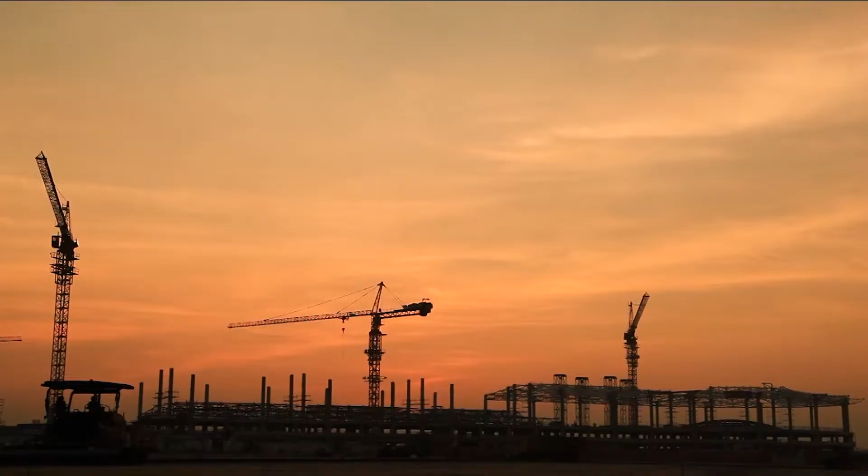A brand new hyper-modern airport is being built here, which is a new starting point for connecting Hainan to the world.

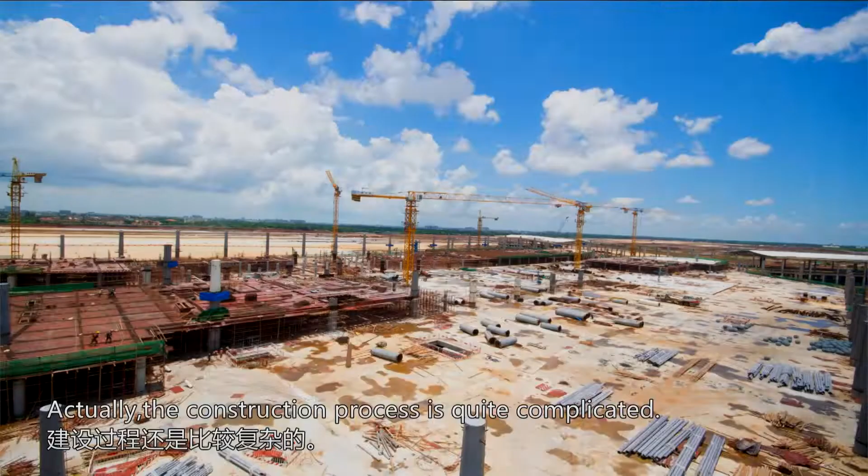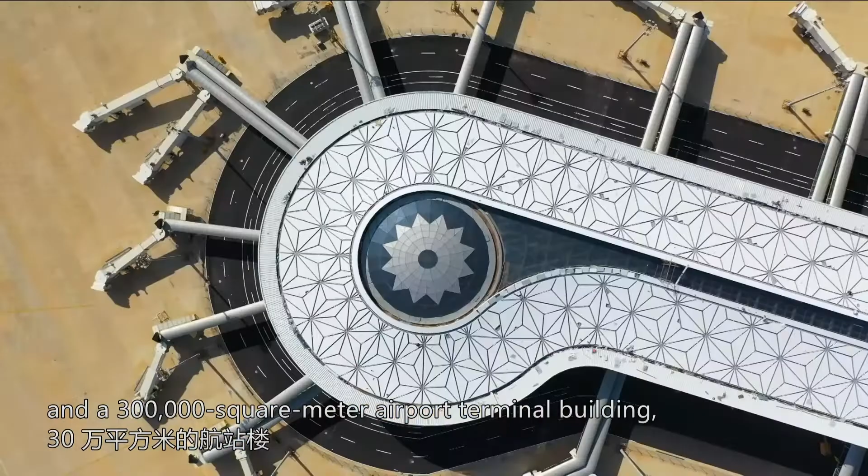Here they build the 4F airfield zone, Category III ILS systems, instrument landing system, and a 300,000 square metre airport terminal building. This is a major project of symbolic importance for the construction of the Hainan Free Trade Port.

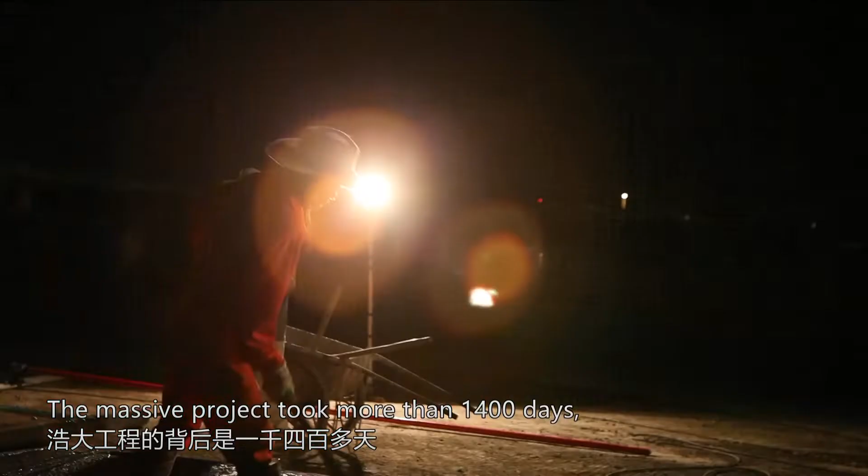Pan Jian, on-site commander-in-chief of the Meilan Airport Phase 2 expansion project headquarters. In 1992, Pan Jian came to Hainan to take part in the construction of the Sanya Phoenix Airport. During his career of more than 20 years, he participated in the construction of Meilan Airport and Boao Airport.

Meilan Airport Phase 2 expansion project is a greater challenge.

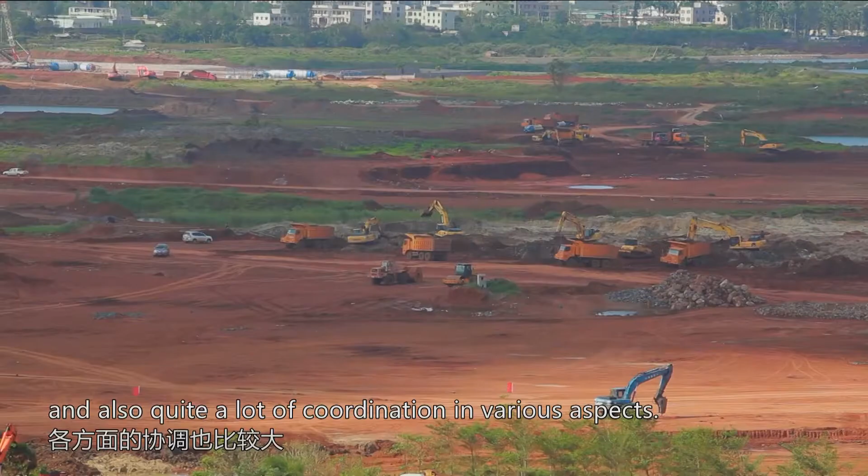The geographical location of Hainan Island makes air transportation the main mode of transportation for passengers. From the establishment of a Hainan Special Economic Zone to the construction of Hainan Free Trade Port, the very fast development of Hainan has also promoted the rapid development of Hainan's air transport industry.

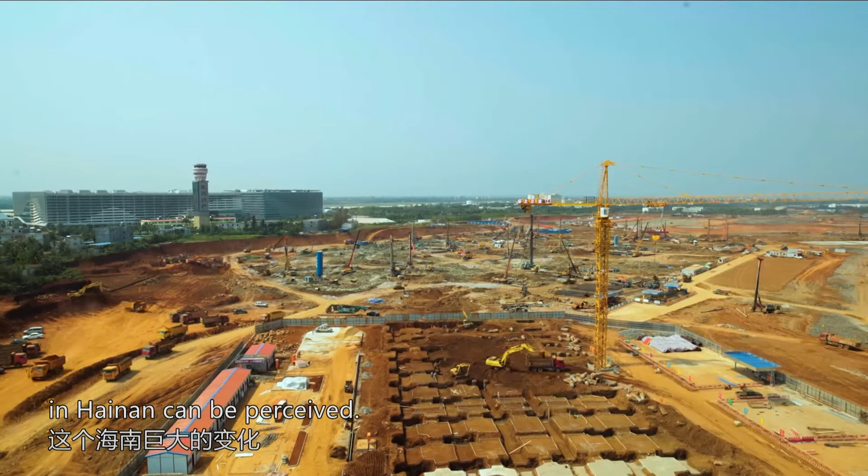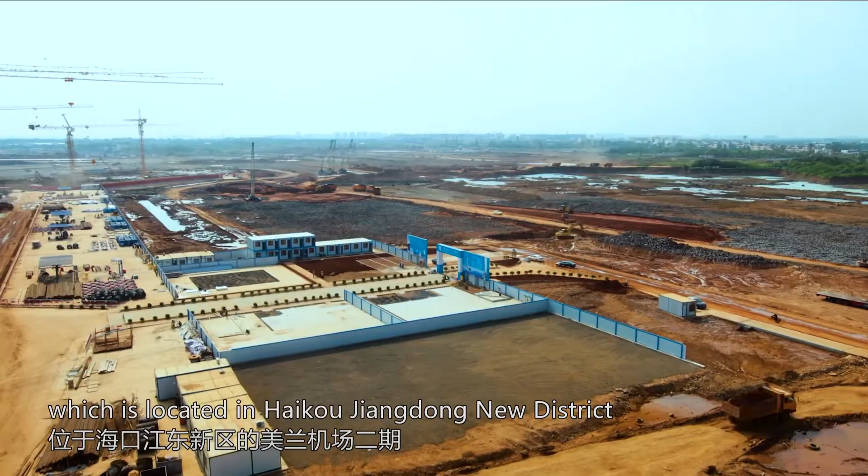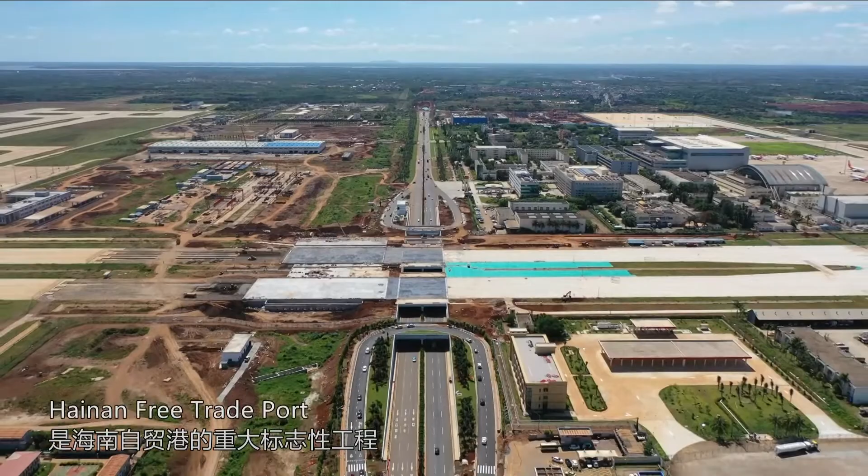On September 6, 2016, the second phase expansion project of Meilan Airport, located in Haikou's Jiangdong New District, started construction. This new airport is a world-class airport, a major landmark project of Hainan Free Trade Port, carrying the important mission of expanding and upgrading Hainan's passenger reception capacity.

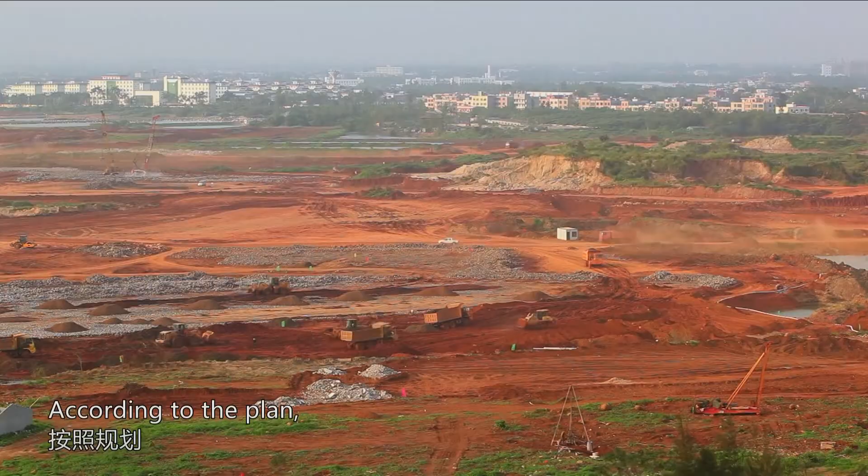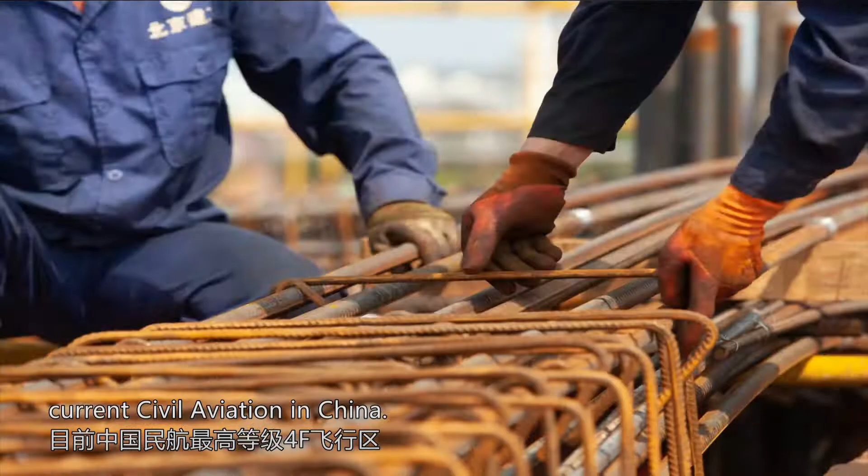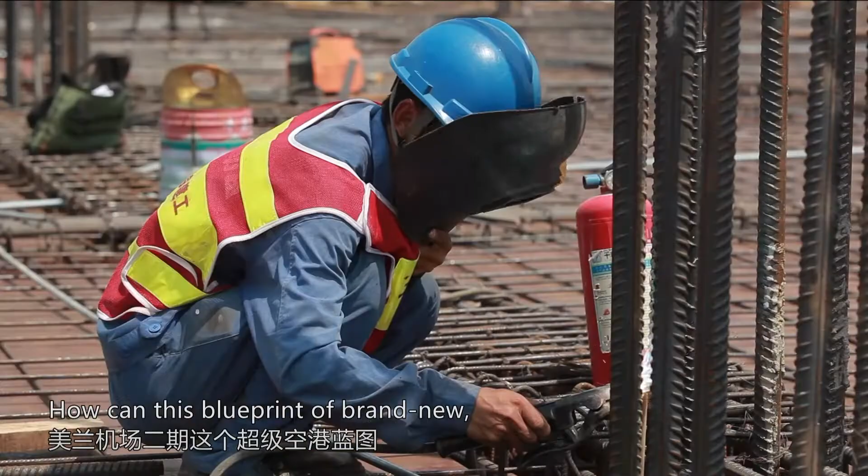According to the plan, during Phase 2 of Hainan Airport, the 4F air zone will be constructed, having the highest level of current civil aviation in China. Also, a 300,000 square metre airport terminal, a comprehensive transportation hub, and other auxiliary projects will be realised. How can this blueprint of brand new, hyper-modern Hainan Airport Phase 2 become a reality?

Hu Dongwei is General Manager of the Engineering Department for the airfield zone of the Hainan Airport Phase 2 expansion project. She worked as a construction engineer in many large public building projects. In 2003, she left her hometown and came to Hainan to participate in Phase 1 of the expansion project of Hainan Airport.

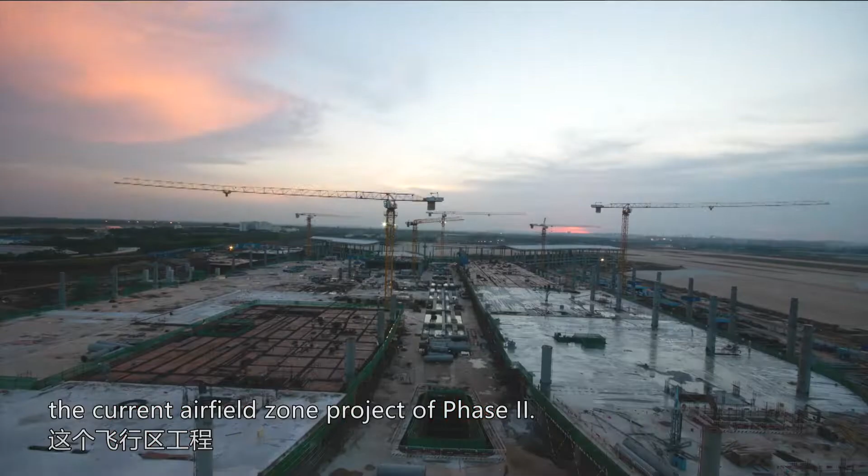During these years of practical experience, Hu Dongwei increased her skills all the time. As long as she is present, many problems at the construction site are easily solved. Danger doesn't scare her. Her colleagues praise her as Wonder Woman.

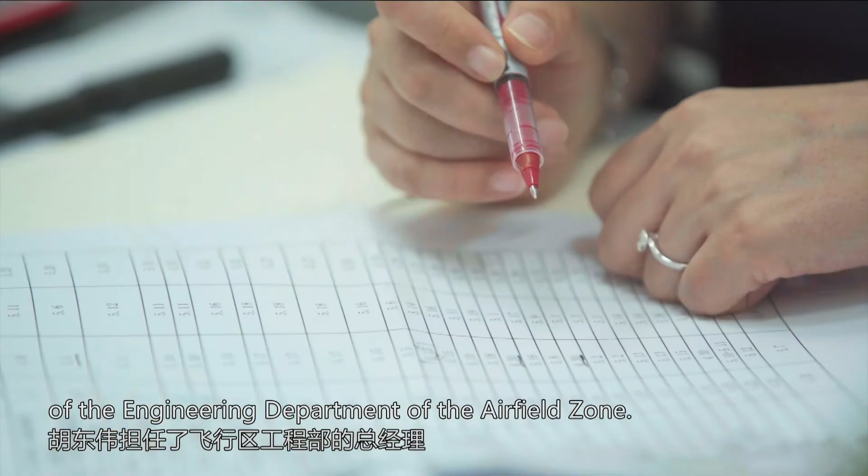When she joined the project in 2016, Hu Dongwei started to hold the post of General Manager of the Engineering Department of the Airfield Zone. Since then, she has never left the front line of the construction. Every aspect of the project is registered in more than 10 notebooks.

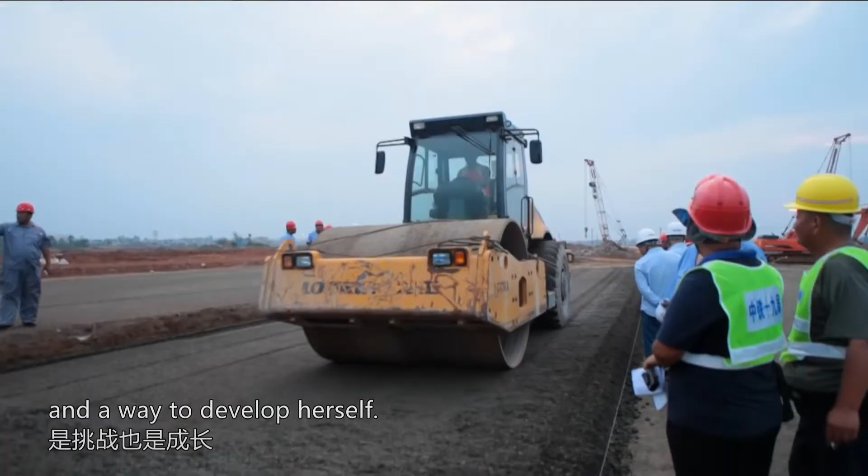Building for the first time from scratch a completely new top-level airfield zone, for two runways, was both a challenge and a way to develop herself. The project of the airfield zone is the most important basic project of the airport. It has the complicated and important task to provide safe takeoff, landing and taxiing of aircrafts.

The construction of airstrips is extremely demanding. The speed at which a plane weighing hundreds of tons takes off reaches about 500 kilometers per hour, which is 1.5 times faster than the speed of high-speed trains. To ensure the safety of flights, the airport's runway must be firm, durable and smooth. The key point to guarantee the smoothness of a runway is that the stiffness of its foundation must be uniform.

Hainan, with its tropical monsoon maritime climate, welcomes the rainy season from May to October every year. Rainy days pose many challenges to the construction of airstrips.

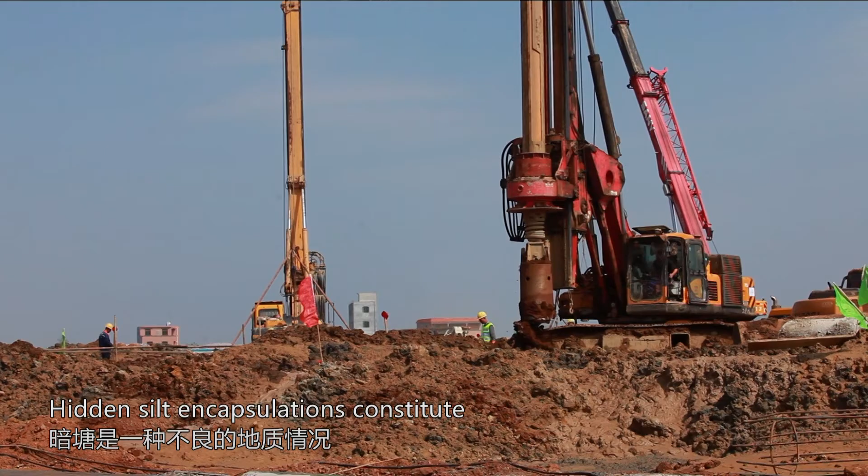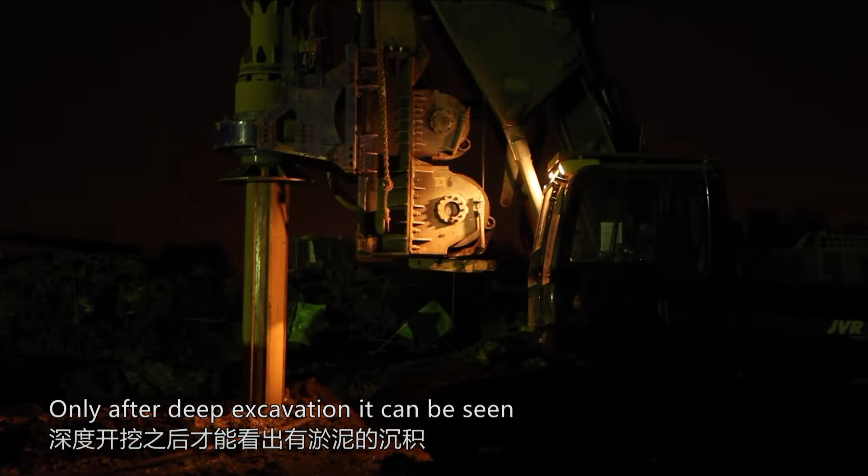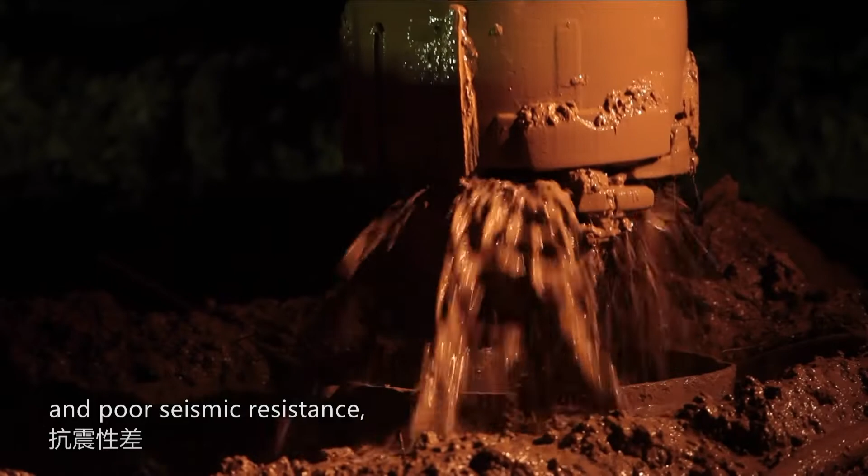Hidden silt encapsulations constitute a kind of harmful geological condition. At the surface, they cannot be seen. Only after deep excavation can it be seen that there is a deposit of silt. The deposited silt has low mechanical strength, strong compressibility, and poor seismic resistance, and therefore easily causes subsidence of the foundation of a built structure.

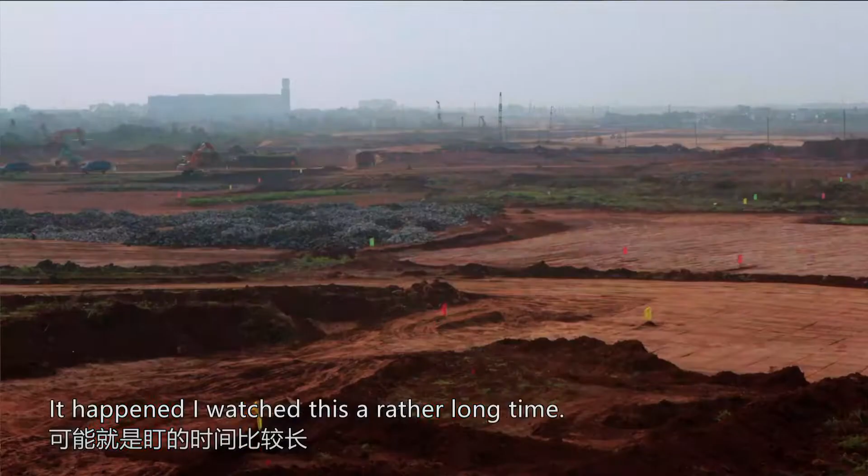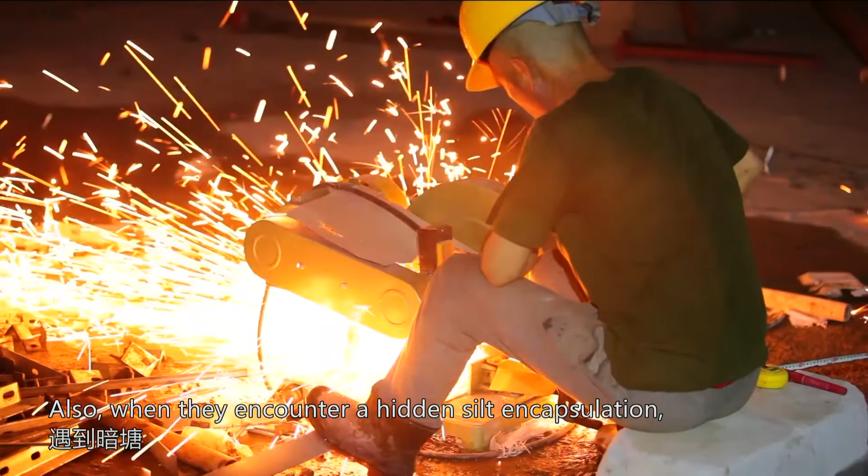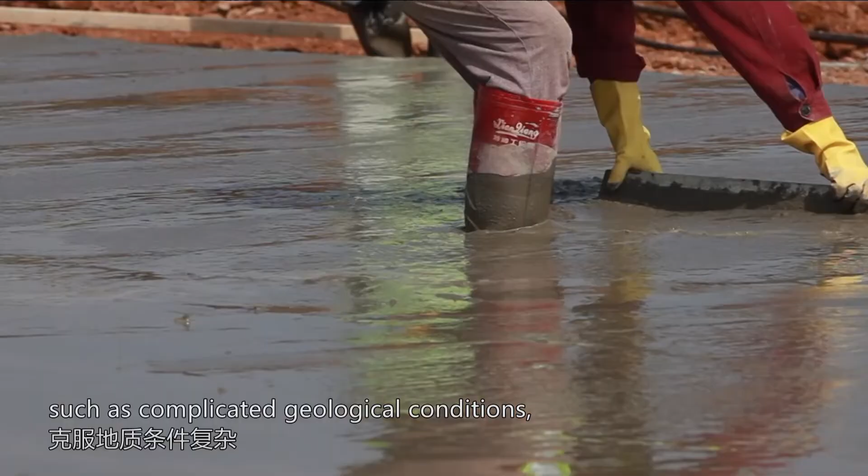All the people involved in the construction work very hard together and are collaborative in their efforts. Also, when they encounter a hidden silt encapsulation, even though the concrete has already been poured, it must be destroyed and then poured again, in order to overcome factors such as complicated geological conditions, typhoon weather and so on.

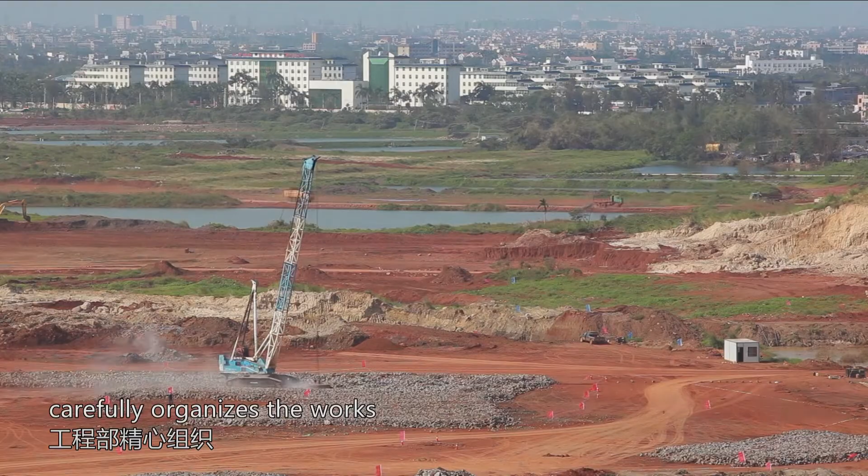Earthworks, foundation, pavement and other procedures are carefully planned by the headquarters, and the engineering department carefully organises the works in a scientific way.

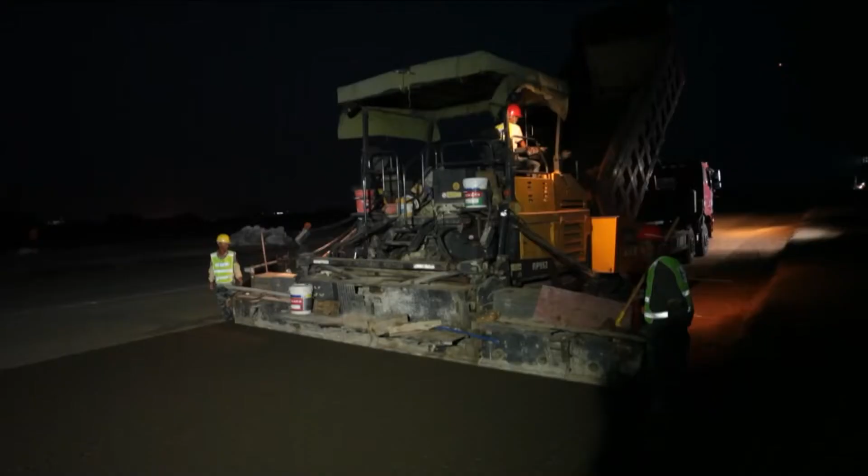After 138,000 times of dynamic compaction, the paved concrete surface exceeds 2 million square metres, with a precision of height difference within 5 millimetres. On September 29, 2018, the runway of the airfield zone was completed and displayed its final shape.

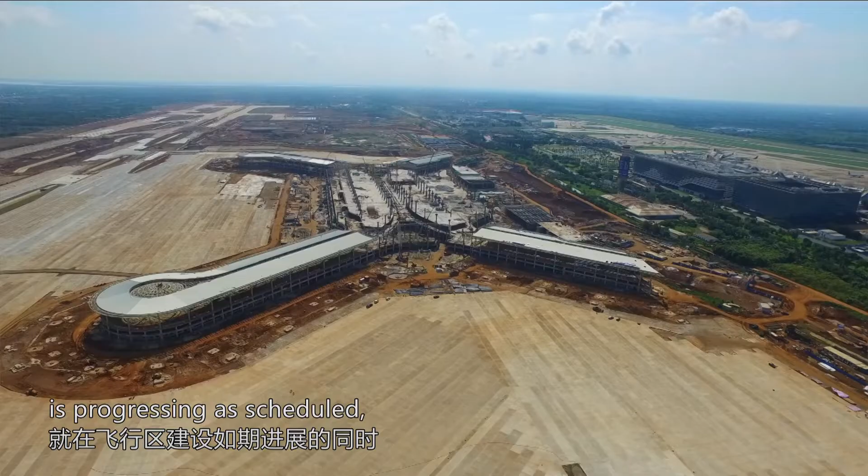At the same time, the Airfield Navigation Aid System adopted 3 types of the most advanced instrument landing systems, ILS, in the world. Pilots can take off and land with their aircraft without vision by relying on their onboard instruments. This will drastically reduce flight delays or flight cancellations caused by bad weather. While the construction of the flight area is progressing as scheduled, the airport terminal is being connected with the flight area. A new stage of the construction is starting.

An airport terminal is one of the main buildings of an airport. It is also the gateway for passengers to enter and exit a city. It's the place where passengers check in and hand over their luggage, and also where passengers arrive. In short, it is the most crowded place in the airport.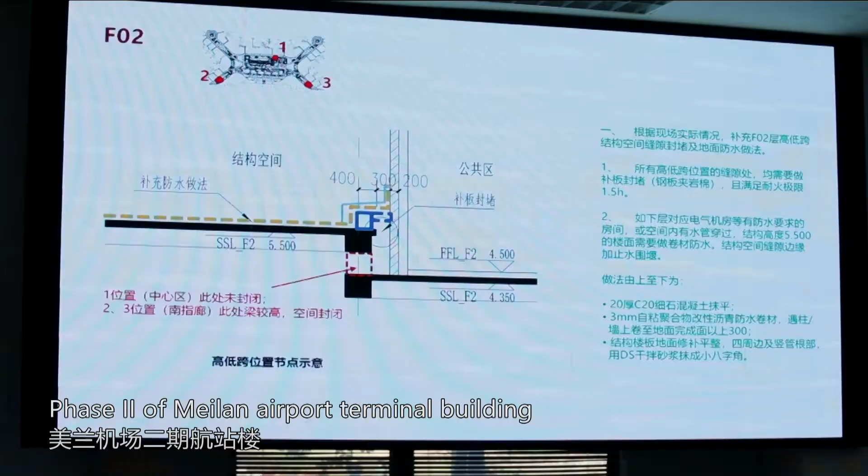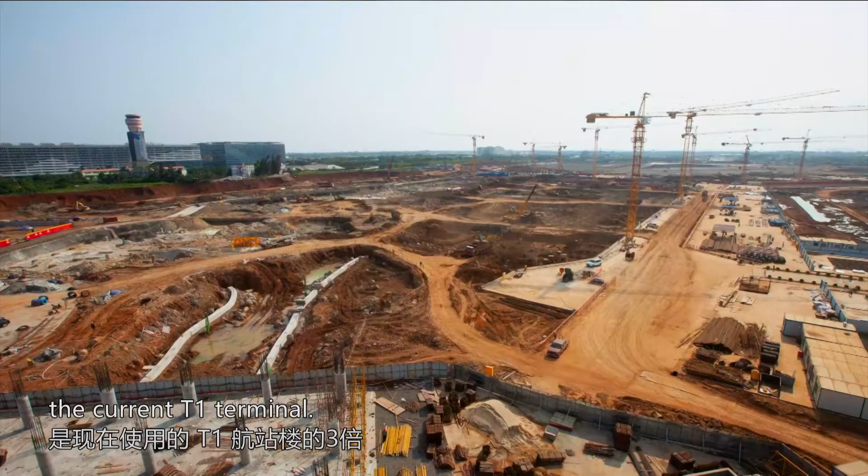According to design requirements, Phase 2 of Meilan Airport Terminal building covers an area of 300,000 square metres, 3 times the size of the current T1 terminal. As a key project in the construction of Hainan Free Trade Port, the Meilan Airport Phase 2 expansion project has been designated a high-quality project and model project, meaning the applied standards and difficulty of construction are unprecedented.

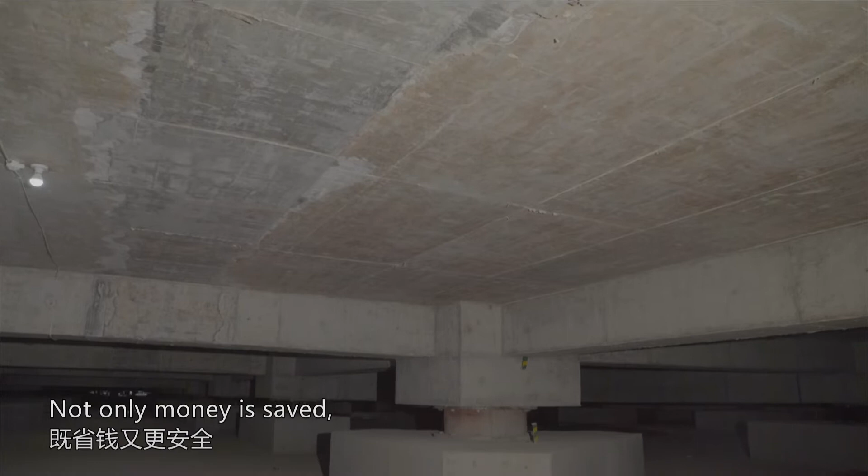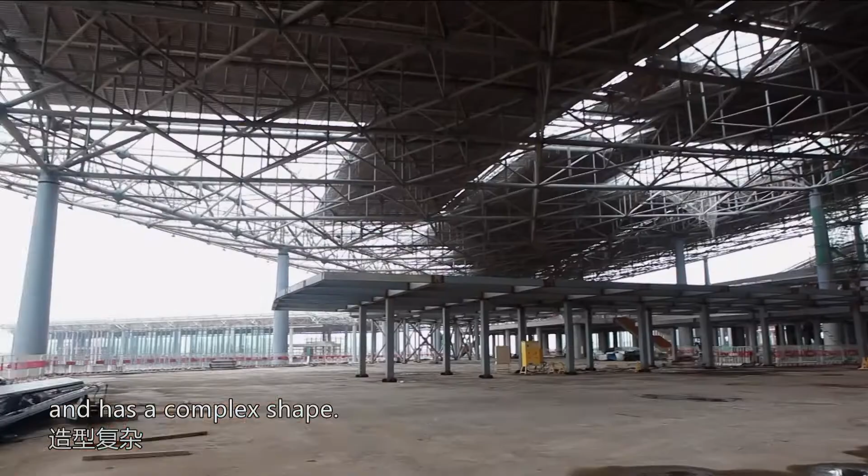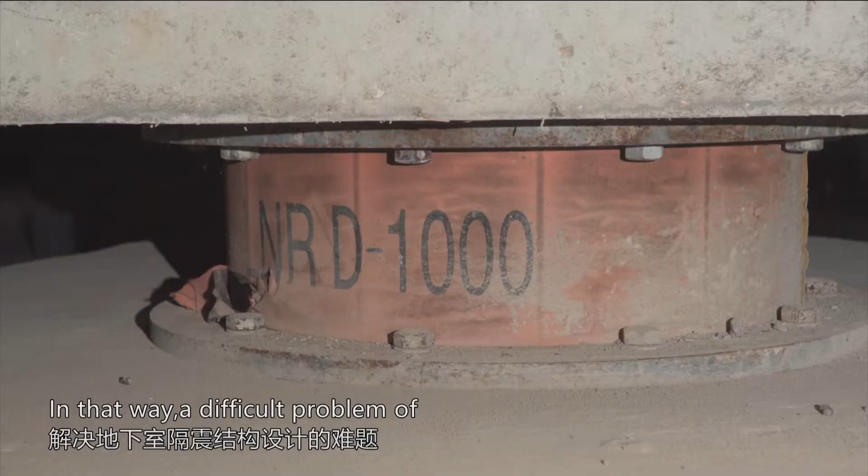After many rounds of technological verification and checking of the calculations of the installation, it was finally decided to apply a floor decoupling vibration insulation technology. This solves a difficult structural design problem, namely the isolation of seismic vibrations coming from the basement of the building. After completion, the airport terminal will be the largest building with floor decoupling vibration isolation technology in China.

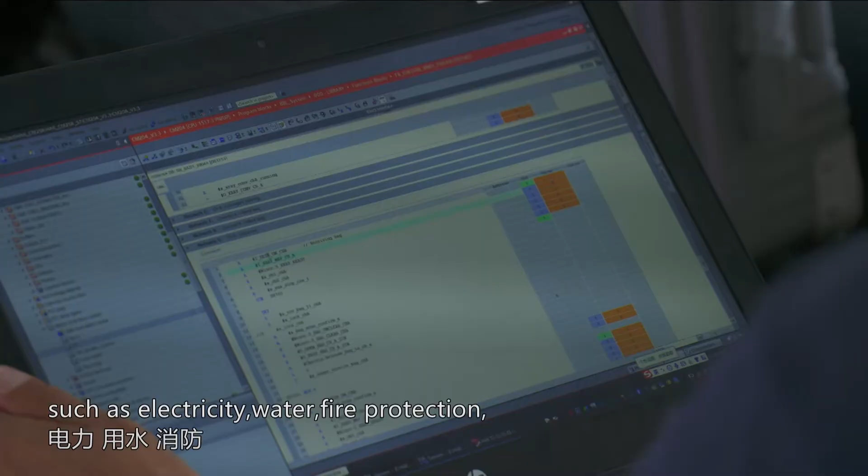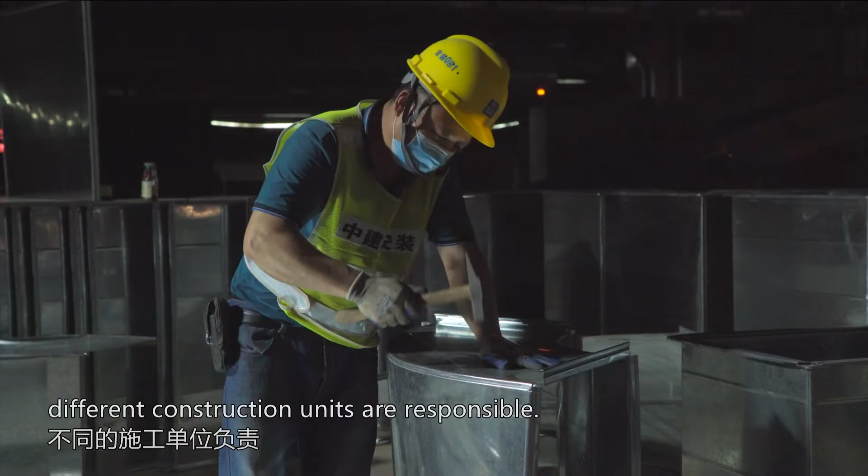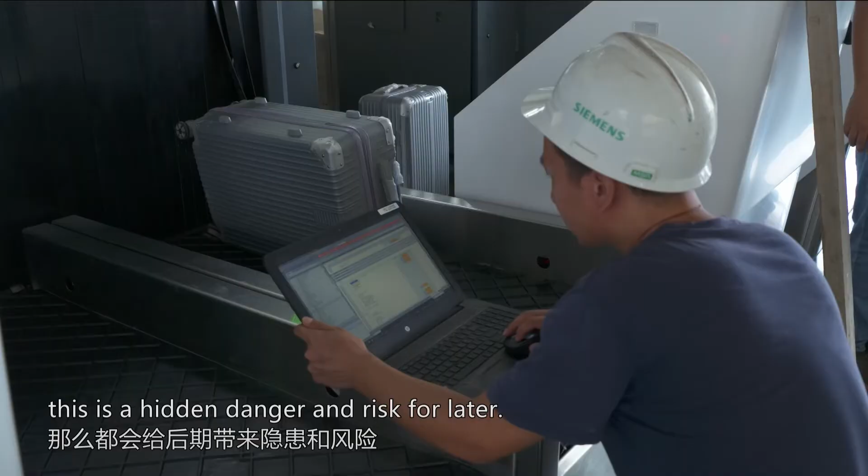Electrical cables and pipelines are essential for providing services such as electricity, water, fire protection, air conditioning, and internet in the airport terminal. Different cables and pipelines should be arranged hierarchically according to their functions. However, different construction units are responsible for different cables and pipelines, and often more than 20 construction units operate simultaneously. If there is an issue with cables or pipelines, this becomes a hidden danger and risk for later.

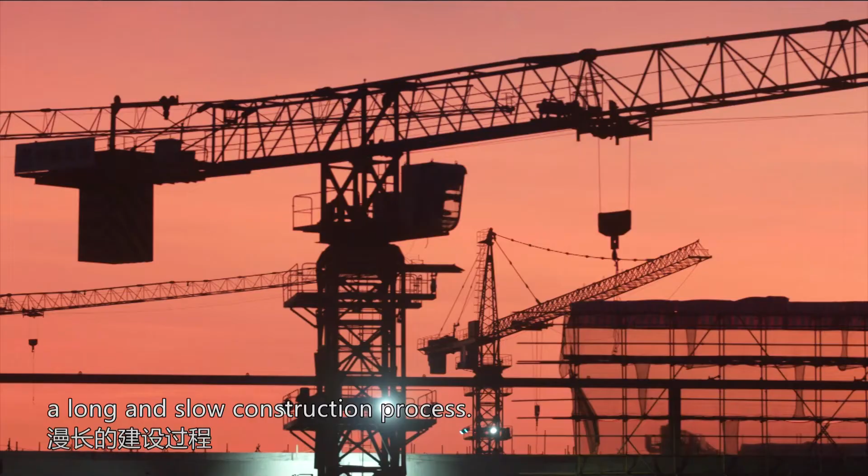It is a huge project, a long and slow construction process. Not any detail should be neglected. All the rooms are given a standard-sized serial number. It might seem a simple task of bringing these numbers in line, but it improves the efficiency of subsequent communication.

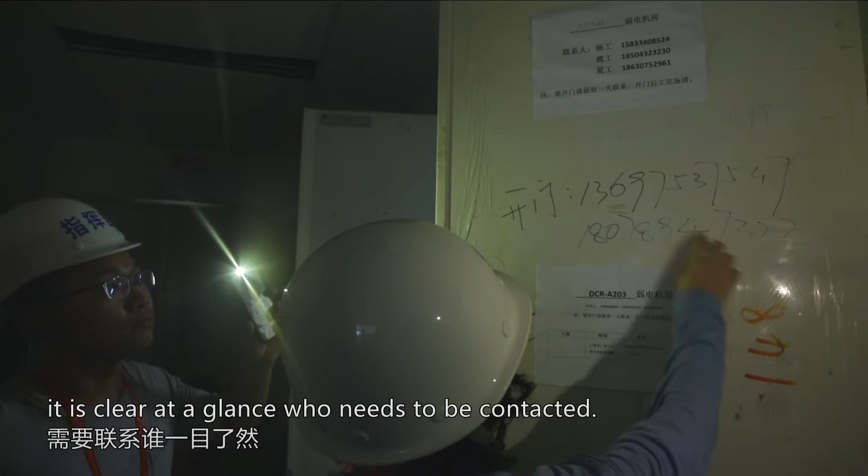According to the requirements, the airport terminal building of 300,000 square metres will be numbered within 2 days, specific about location, function, and the person in charge. When a problem of overlapping tasks is encountered, it is clear at a glance who needs to be contacted. There is systematic coordination, difficulties are tackled and various problems are solved.

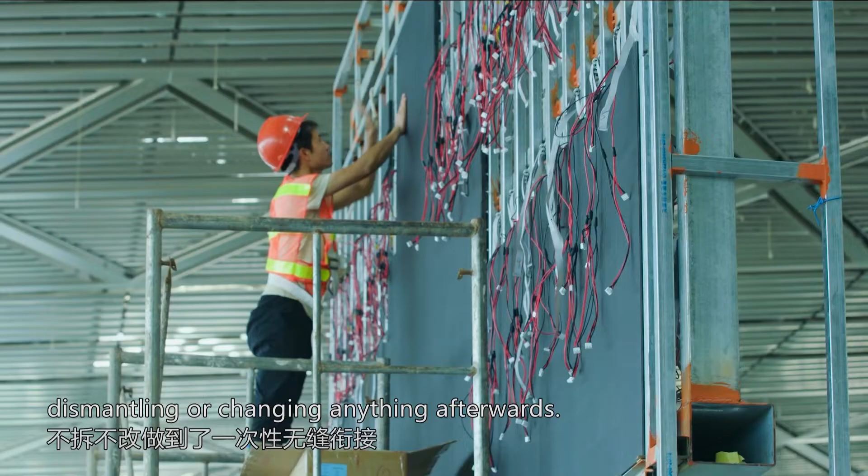The 17,586 sets of equipment in the core area of the airport terminal and the 400,000 metres of wires and cables have been seamlessly connected without any later dismantling or changes.

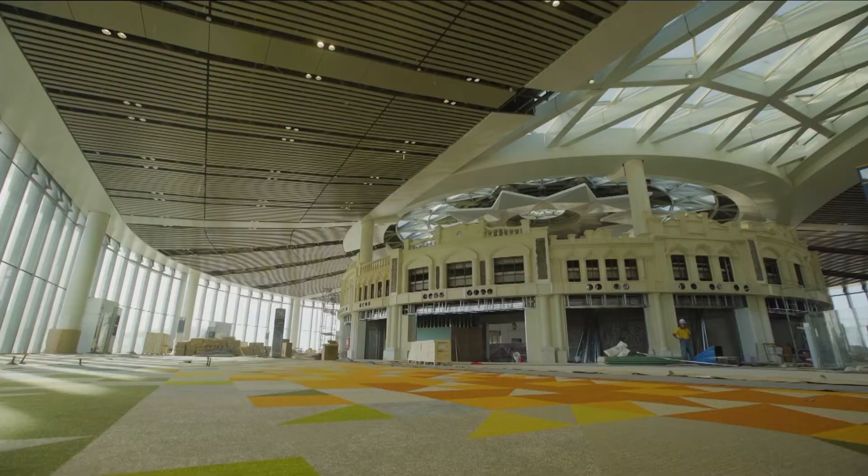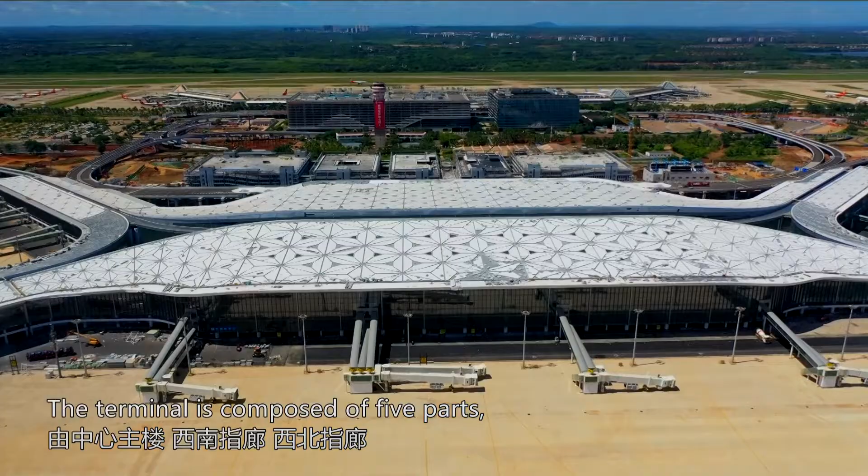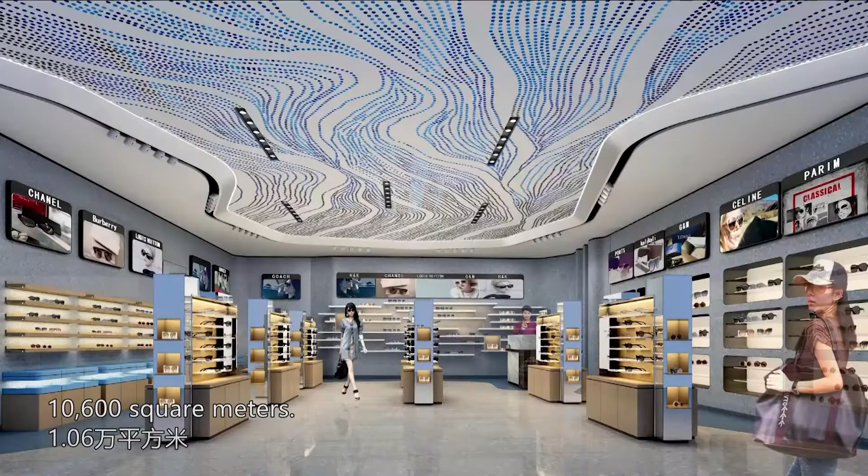The architectural design of the airport terminal is inspired by the tropical gardens and elegant roofs in Hainan's traditional architecture. The terminal is composed of 5 parts: the central main building, the southwest corridor, the northwest corridor, the southeast corridor, and the northeast corridor. It has 5 check-in islands and 110 check-in counters, of which 88 are domestic and 22 are international. The total commercial area is about 33,000 square metres, and the duty-free commercial area is 10,600 square metres - the largest duty-free commercial area in the airports of China.

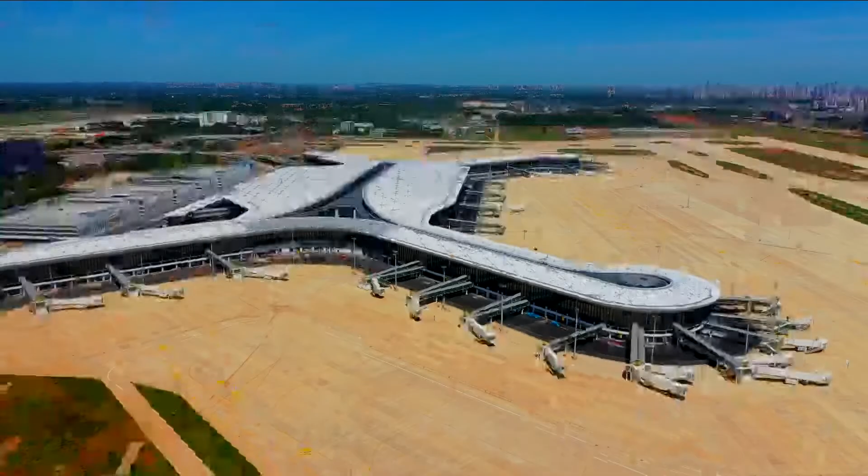When Hainan International New Airport is put into operation, it will operate in dual runway mode, ensuring a maximum annual passenger capacity of 45 million passengers. The airport will also have an annual freight and mail handling capacity of 600,000 tonnes, and will provide the so-called 5th and 7th freedom of navigation rights, allowing an annual capacity of 8 to 10 million international passengers. This provides the necessary conditions for Hainan to become an international aviation hub.

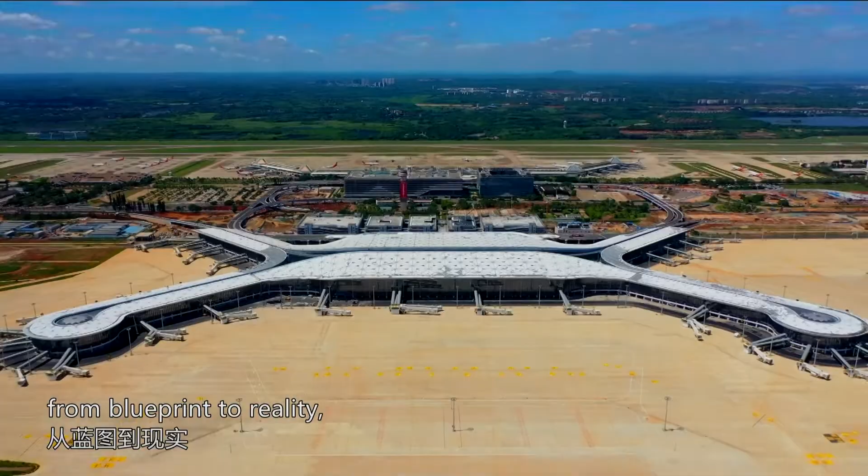After 5 years, from mud to beauty, from blueprint to reality, the construction workers of the Hainan Airport Phase 2 expansion project, with the rigorous attitude of ever improving, created a brand new and hyper-modern airport.